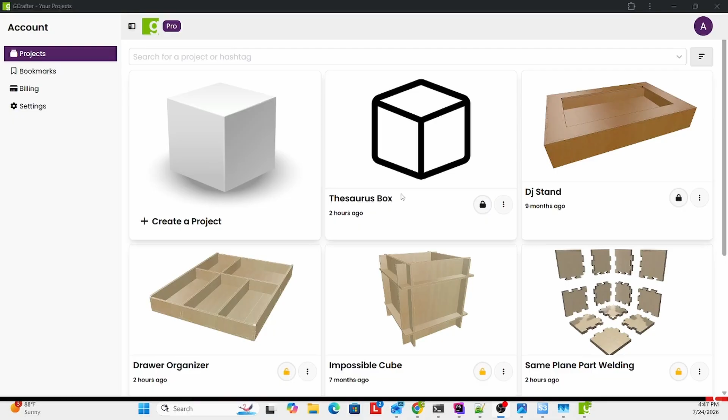So let's get going. First, we're going to create a new project. We'll call it end table. We're going to use a CNC. Or metric is the preferred units for this. Actually, I'm going to do inches, it's easier for me to intellectualize inches than millimeters. And 48 inches by 48 inches, that's the material we're going to use. 1/2 inch thickness, we can change that later. So let's keep going.

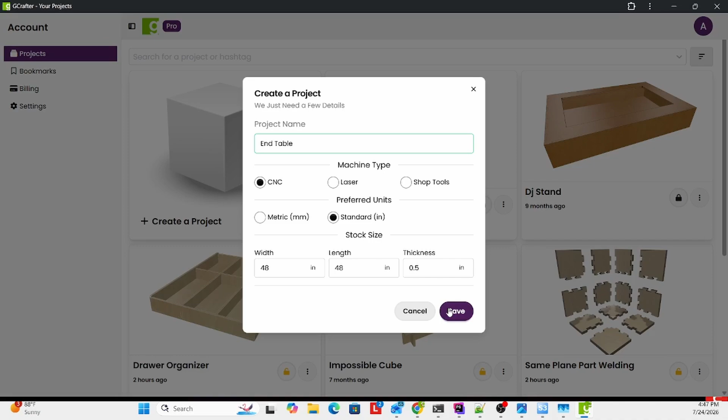We got a box. First thing we're going to do is change our dimensions. So we want this to be 16 inches wide, and about 22 inches tall.

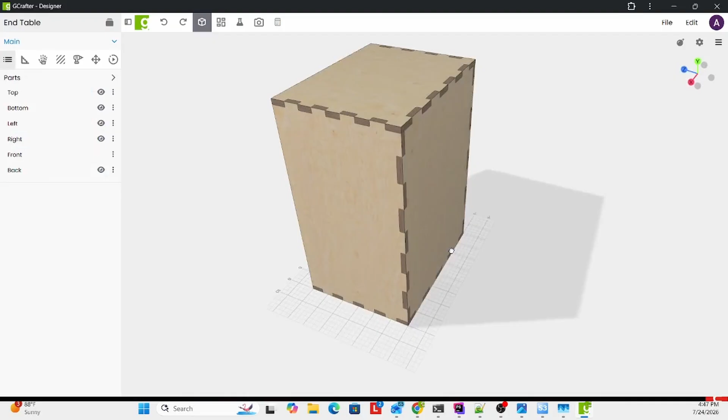Now we know we're not going to need the front, so we're just going to click on that and turn it off. We're going to turn off the back, and we're going to use the bottom. But with the bottom, we're going to set that at 15% of the way up. We're going to move these guys in so that they are 90% of the way out. And that makes this piece, we only want that to be 90% width.

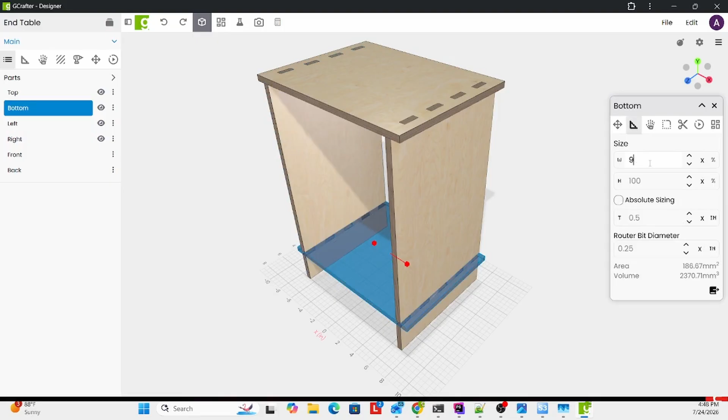Now that's still just kind of a box. Well, let's make it a little more elegant. What we're going to do is throw on some curves on the top here. 1 inch radiuses, not bad.

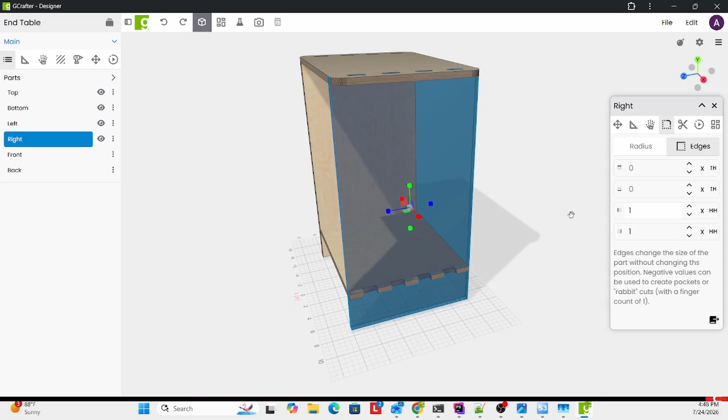And we're going to throw some curves on the bottoms of these guys, let's say 1 inch on the left and 1 inch on the right. Oh wait, wrong button. Here we go, radius. 1, 1. We're going to do the same thing on the other side. 1, 1.

Starting to look like something. Now we don't want these sides to go quite as far as that. So we're going to make those 80% of the width and 80% of the width.

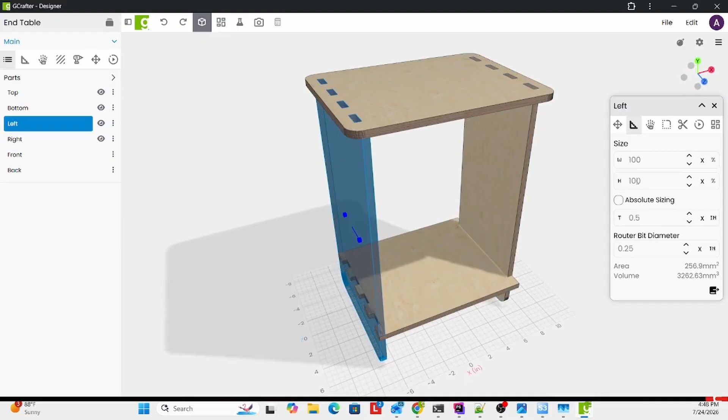Now we got a little problem with our bottom here. So we're going to bring this down to 80% of the width. Oh, wrong button. And make that 80% of the width. Nah, 40% of the width. Nah, 60. Yeah, that's better. Okay, not bad.

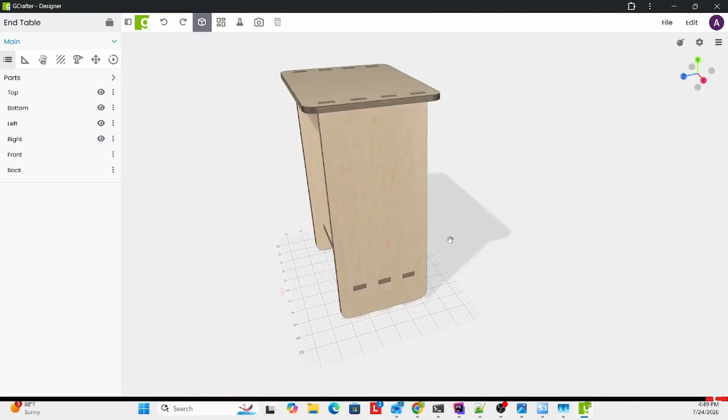Let's cut some holes inside. We're going to bring this into PartLab. And we're just going to draw a rectangle. Let's make that 6 inches wide and 14 inches tall.

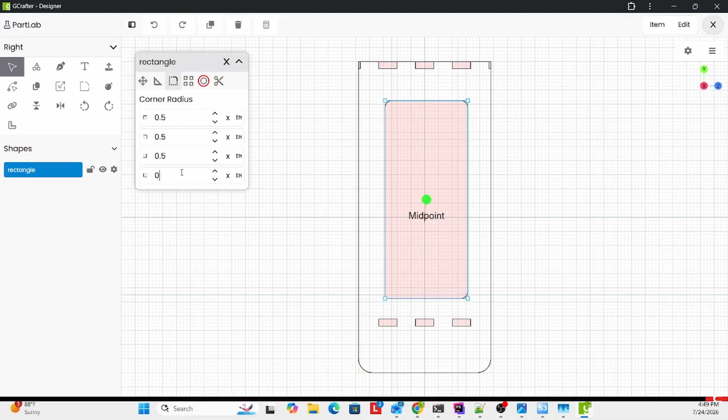Let's add some curves to it, maybe 1/2 inch. Didn't hit that last one. There we go. Now, the action here is by default set to subtract. So anything you cut that's red is going to subtract from the outer part.

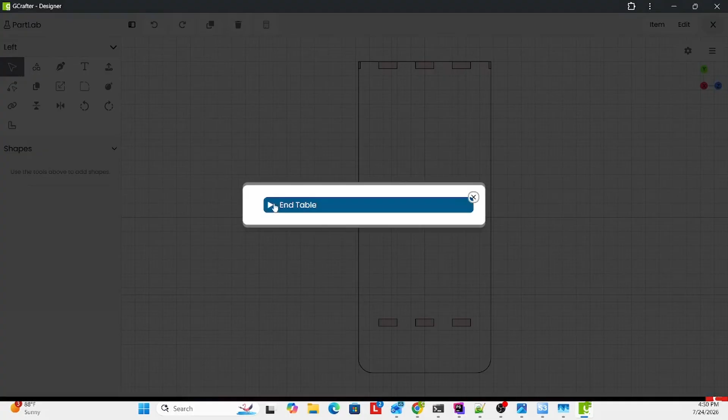Not bad. Let's do the same thing, let's copy from the other side. And look at that, that's starting to look like an end table.

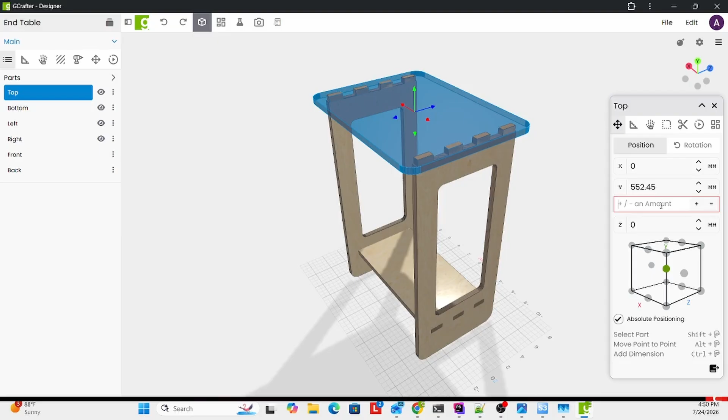I don't think I want the fingers poking through. So what we're going to do is move the top up a little bit so that the fingers turn out to be cut as pockets rather than punching all the way through. So we're going to set absolute position. I'm going to press the A key here, which allows you to add or subtract any amount from any input field. So we're going to go up 4 millimeters.

And we're going to do pretty much the same thing on this support piece here, but in a different way. There's a feature called edges, which allows you to extend or retract any part without changing its relative center. So I'm going to pull back the edge by 6 millimeters and 6 millimeters.

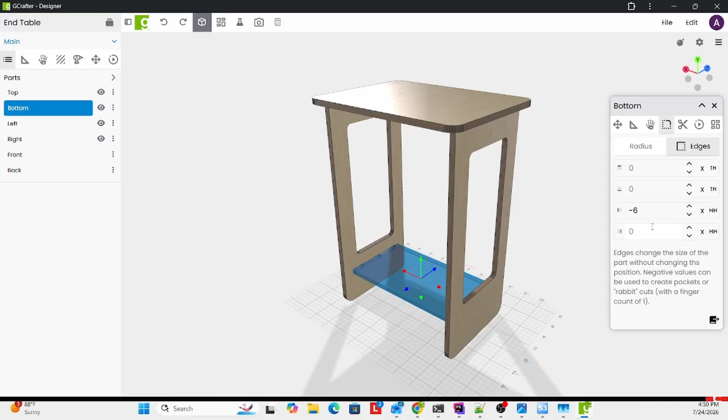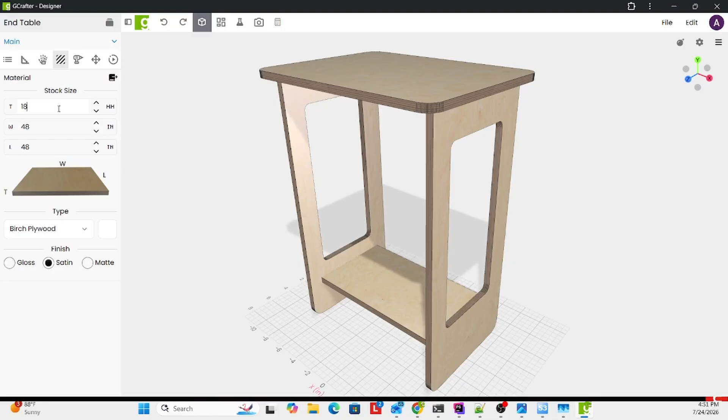Now in the beginning we set this to, switch back to absolute or relative positioning here. And we originally set this to be 1/2 inch, but what we actually want to do is make this out of 18 millimeter plywood. So we set that to 18, and you can see all the fingers and everything, all the parts and dimensions adjusted accordingly.

So let's explode it, we can take a look at the inside here. You can see there's the pockets, they're not cutting all the way through. And those fingers are a bit weird.

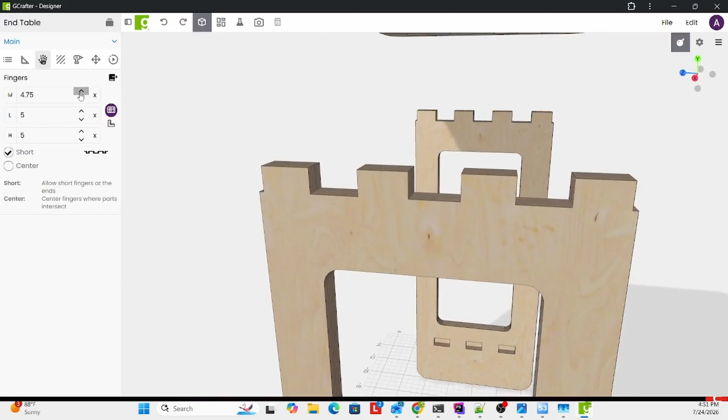So I think what we're going to do is go back to the finger tab here for a second, and we're going to change the length of the fingers. Yeah, I think that'll go together nicely, that'll glue together nicely. Okay, next step, let's take a look at our layout.

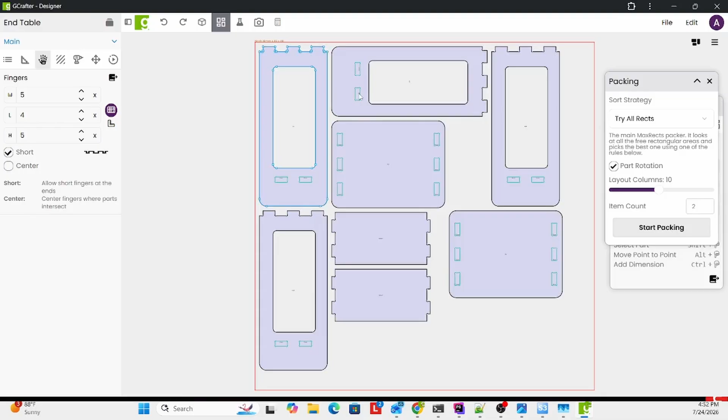That looks not too bad, but we want to make 2 of these to go on either side of an end table. Now that's not great, we don't want the pieces rotating. So we're going to go to our layout settings here, I'm going to turn off allow rotation. That looks like a great pack, I can get that cut in a Saturday afternoon.

So let's save it right here. That's going to force me to take a screenshot. Not a very good one, but we'll take another one in a minute.

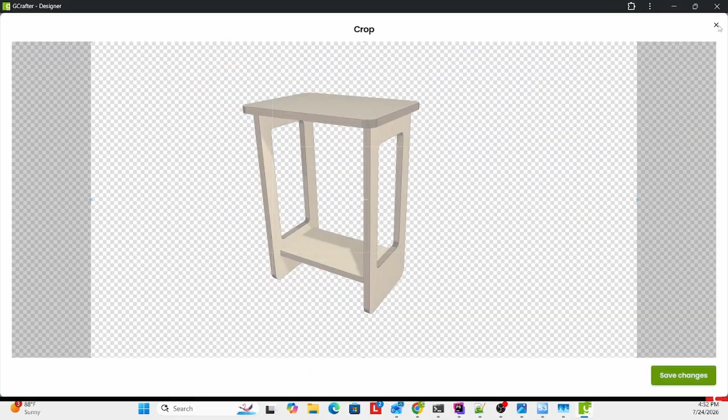So next step, we're going to jump into Photo Studio and we're going to do a rendering. Ooh, wrong button. Okay, so we're going to update the thumbnail. No, don't want to do that. Let me come over here, let me adjust this to a better position. And then we're going to update the thumbnail.

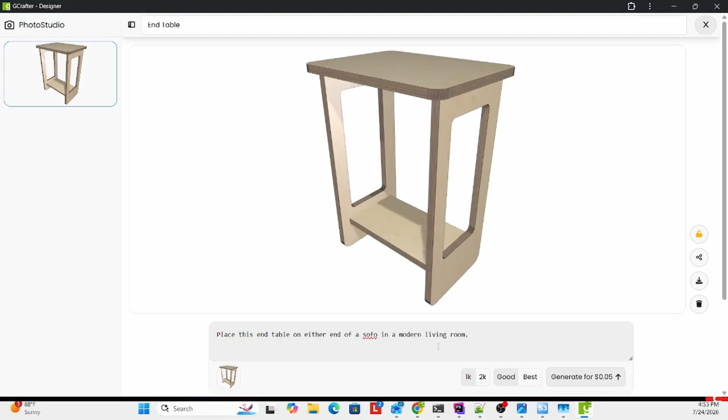Now we're going to tell the AI exactly what we want to do with this thing. So: place this end table on either end of a sofa in a modern living room. Boom, let's see how it does. Doesn't always get it right, but let's see. I can live with it.

Save, close, save. Let's just update the thumbnail.

All that's left is to click export, choose your preferred file format, SVG, DXF, PDF, whatever. Take it to your CAM software, create some toolpaths, a couple end tables in an afternoon.